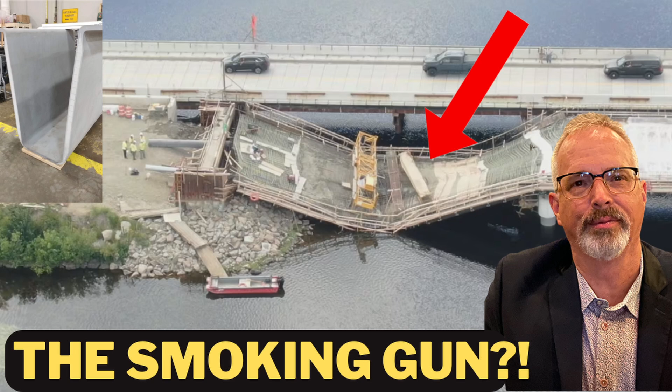Hi, everyone. I've got an interesting update for you today on that situation of the partial bridge collapse in Old Town, Maine that occurred on August 13th, 2025. I'm recording this video on August 18th.

Many of you have reached out with some great insights as well as source information. One of you was obviously a structural engineer and pointed out that they believe there was a construction sequencing issue. I'm going to go over this in more detail, but this source pointed out to me that there could be a serious issue with construction sequencing if, in fact, they placed concrete inside these composite tub girders at the ends prior to placing the concrete for the bridge deck. That looks like that could very well have been the case here.

Now, one concern I have already is that there's a lot of interconnectivity among all the principal players on this project. You have the Transportation Infrastructure Durability Center that gets tens of millions of dollars of federal funding to conduct research that leads to things like these composite tub girders, and they've apparently started pulling videos, or at least in one instance pulled a key video from public viewing from their YouTube channel. It's either been deleted or privated. This was reported on by Maine Public, and I've confirmed there are bits of the meta tags of this video out there on the internet. So this video did exist up until recently, and the title is FRP Composite Tub Girder Installation for the Stillwater Bridge Replacement, March 2025. So I don't think that's a good look.

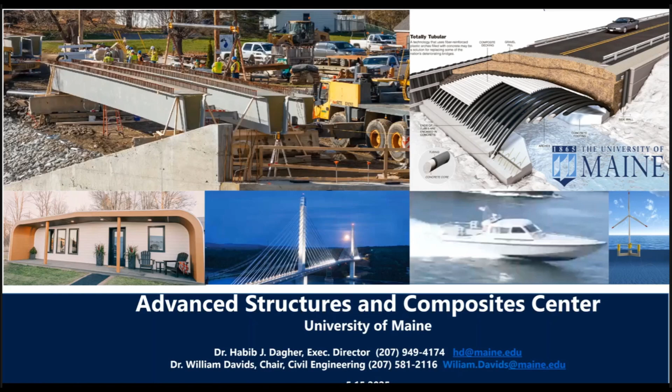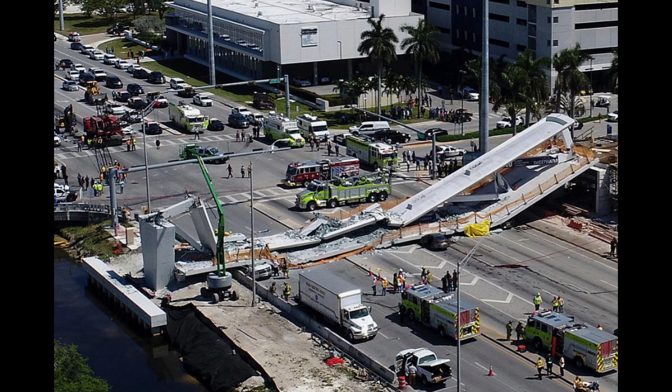Now, fortunately, there are some videos related to this technology and specifically to this bridge that have not been deleted. I'm going to cite heavily from these two presentations. If you're wanting to check out the entire videos, there's links in the description. A more technical presentation was presented by people with the university as well as the manufacturer of these composite tub girders. This webinar was hosted by Florida International University. That sounds familiar - they had the tragic pedestrian bridge collapse that occurred in 2018 that killed 6 people.

Now, the university developed this composite tub technology and licensed it to a Maine company, Basalt International. Technically, the girders are manufactured by AIT Bridges, but they went bankrupt and were acquired by Basalt International in January of 2025. See this tout sheet I covered in my previous video.

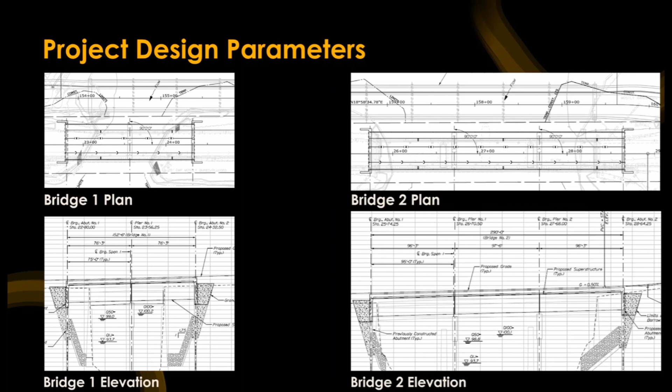Now, again, from this technical presentation, there were a lot of details associated with this Stillwater Bridge that suffered the span collapse. There are really two segments of the bridge, what they're calling Bridge 1 and Bridge 2. Bridge 1 has a total length of 152.5 feet, comprised of two 75-foot long spans. Bridge 2, where the failure occurred, is a total length of 290 feet, comprised of three 95-foot long spans.

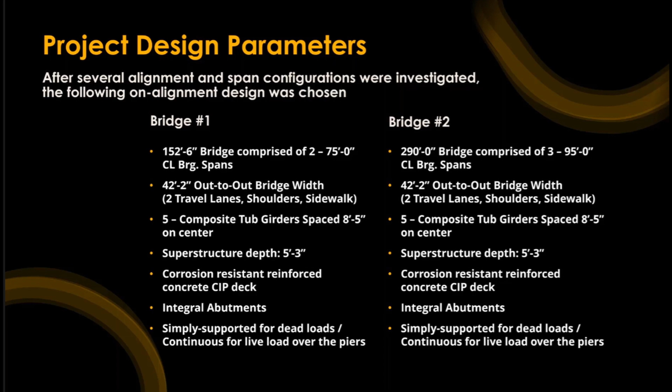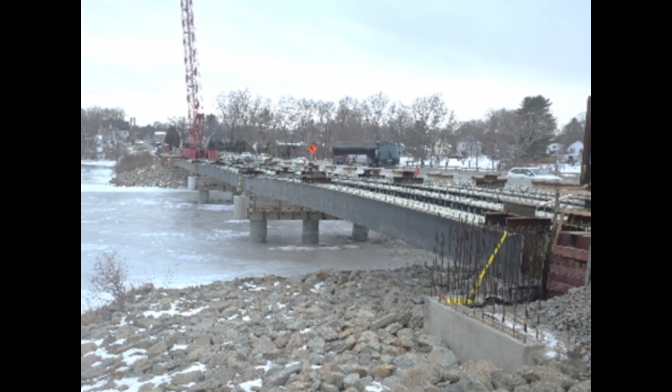Each span has 5 composite tub girders spaced a little over 8 feet center to center. The depth of the girders is a little over 5 feet. See a photo here from the Maine DOT website for this project. This is a close-up view of a composite tub girder.

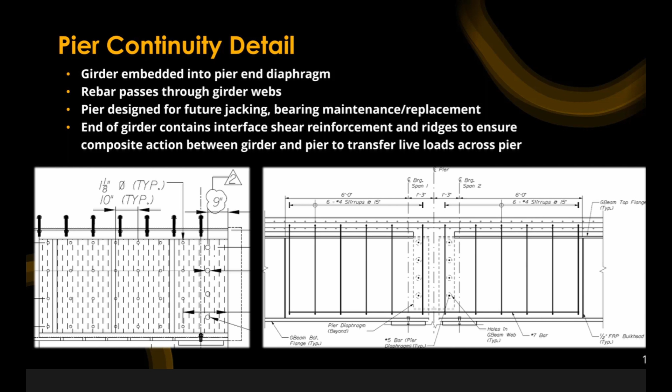Now, going back to what the structural engineer shared with me, these composite tub girders are empty inside, but they get concrete infill on the ends and at the center where they go over a pier at a given location. This is showing the cross section with infill at the ends. And when you have this concrete infill, they've got shear connections to hold it all in place inside the composite tub girder.

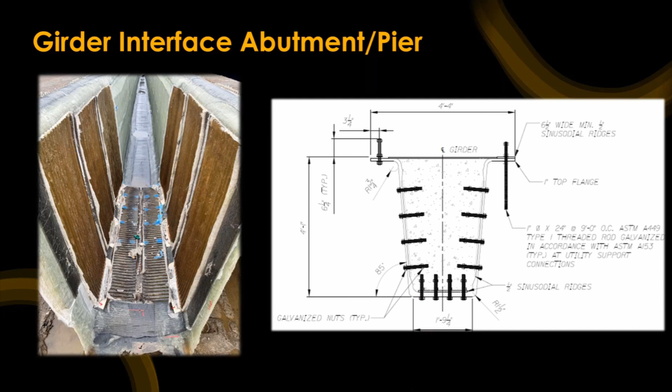What this structural engineer was explaining to me: you have a camber or a bow in these girders, and the high point is on the top surface. When you set these girders on the abutment or a pier, you're anticipating the loading from the subsequently placed bridge deck to flatten out or push down that camber to straighten it out. And when that happens, the girder elongates on its connections.

And if you have the ends fixed or rigid so they can't move outwards because you've already got your concrete infill there, you're going to have stress concentrations that could be problematic and could perhaps have contributed to this failure here. Now, I'm just going by the drone photos. It looks like the infill may have occurred there already.

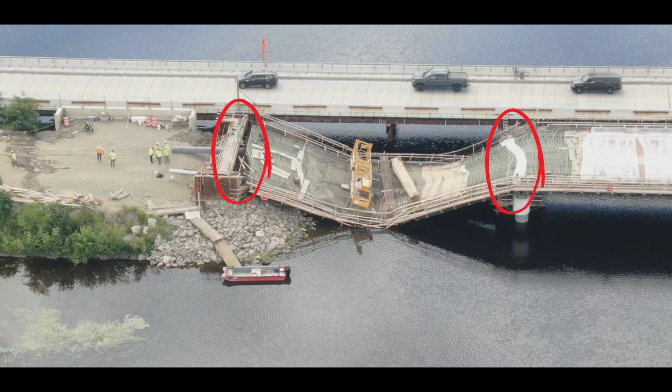As part of the development and implementation of a technology like this, you would need the designer to specify in very great detail what the installation sequence needs to be, and of course the contractor would need to follow such an installation sequence. So I'm sure that's going to be part of any forensic investigation as to what happened here. But it sure looks to me like there may be concrete infill already on these end pieces.

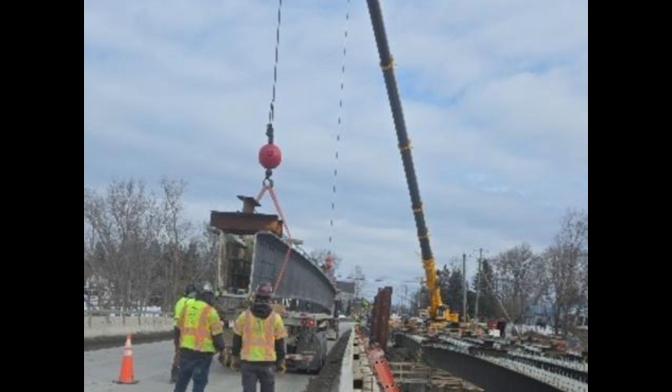And of course, you have the concrete paving machine sitting at the center of this span in preparation of placing the concrete over the bridge deck. Here's a photo showing one of these composite tub girders being offloaded from a truck. You can see the camber there at the top of the girder.

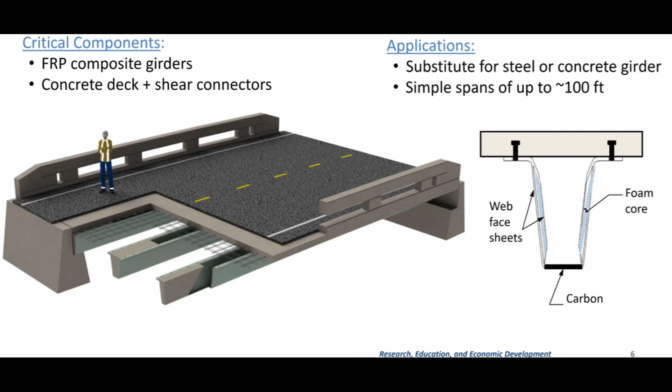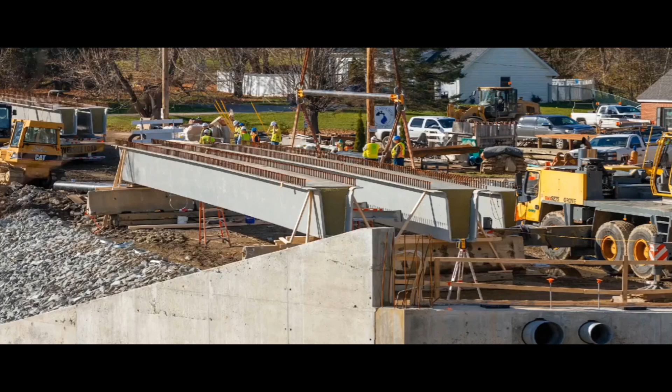As you might expect, a lot of the rigidity of the overall superstructure comes from having the bridge deck in place over the girders. So during construction, before that's happened, the overall structure could be more vulnerable to mishap. You see a picture of these shear studs where the bridge deck connects to. In the future, if you need to replace the bridge deck, you can remove the bottom of those connectors below the girder and then just peel the bridge deck off and replace it.

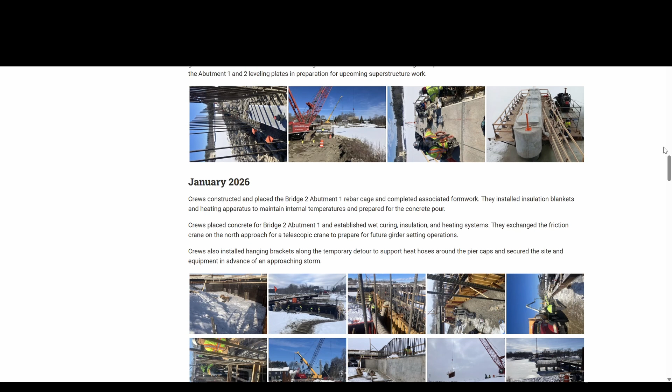So construction sequencing is one suspected issue associated with this bridge collapse. Another, as I alluded to in the previous video, is there are numerous mentions of damage and repairs to these composite girders on the Maine DOT website for this project. And again, I have to wonder to what extent well established procedures to identify damage and to repair it and inspect it were defined for a project like this.

And if there were damaged girders, what caused the damage? How extensive was the damage? Should the girders have in fact been replaced? Those are questions that I asked Maine DOT, and they're not providing any answers at this point.

Now, I want to tie in what the overall funding mechanism is for technology like this. The Department of Transportation has a program called ARPA-I, and it's a program to develop advanced technologies for improving the overall transportation system in the United States. And a subset of this ARPA-I program is called XBridge.

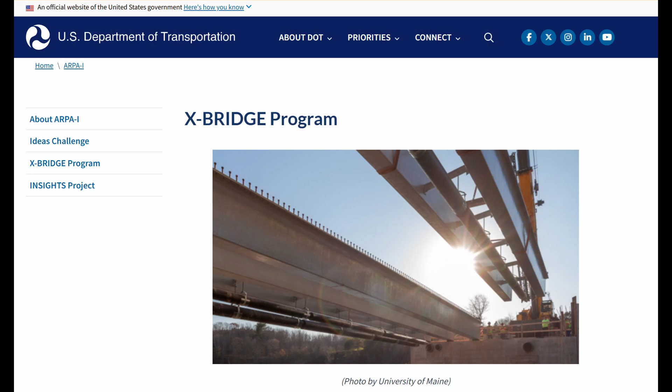And it looks like XBridge has provided $23 million to the University of Maine's Advanced Structures and Composite Center, where this composite tub girder technology was developed and then later licensed to Basalt International. The program is pioneering a bridge design approach that utilizes high performance corrosion free materials to replace traditional corrosion prone construction. Well, that's a good goal to have.

Corrosion is a multi-billion dollar problem in the United States for bridge infrastructure. Now, this caught my attention. The program is rapidly transitioning from theoretical design to real world validation through full scale prototypes and milestone demonstration projects. Rigorous durability evaluations, including accelerated aging and full scale fatigue testing, are underway to validate a 150-year service life. Demonstration projects are planned to be built over the next 5 years. XBridge is collaborating with state DOTs and the composite industry to explore and overcome barriers to implementation.

Well, of course, a potential big barrier to implementation is when you have a catastrophic failure that occurs during construction. Again, we don't know the details. The investigation's ongoing, but I emailed this XBridge director, Miss Severance, and she told me just to reach out to the DOT, and I told her I already had, and I thought as director of XBridge, she might have something to say about the program's future, any thoughts about what happened with the Stillwater Bridge, and I got no response.

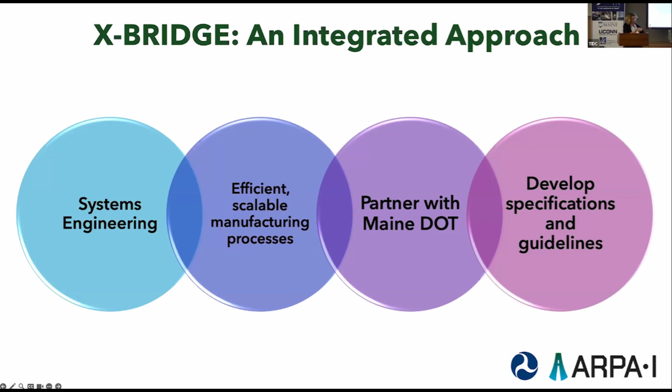Now, as part of her presentation, again, linked in the description, the overall process here is to utilize systems engineering to transition into manufacturing, partner with, in this case, Maine DOT, and develop specifications and guidelines. And what a systems engineer's key responsibilities are is they write and translate the client's needs into clear technical specifications. They figure out what needs to be done.

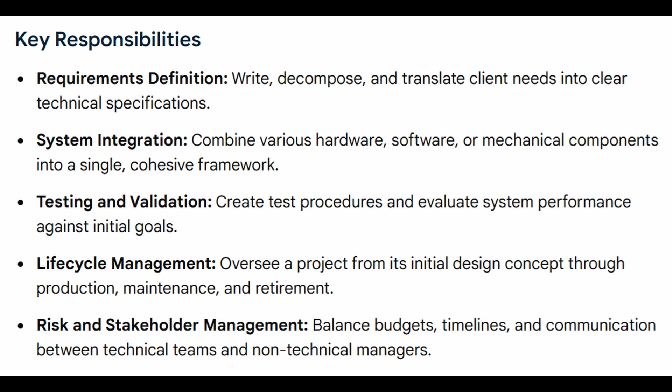They provide systems integration, combining hardware, software, mechanical components into a single cohesive framework. They define the requirements and verification for testing and validation. They define all the aspects of the life cycle management from design concept through production, maintenance, and retirement, and they look at risk and stakeholder management in terms of budgets, timelines, communication between technical and non-technical team members. So they're involved in the process from soup to nuts, as they say.

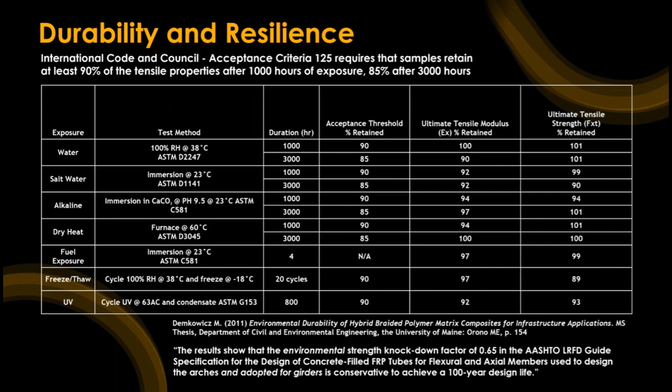Now, many of you asked in the previous video, how could anyone expect a composite bridge to last 100 years or 150 years? And I still think it's an open question. The short answer is they did modeling. So they subjected these composite tub elements to various environmental and loading cycles. But it looks like the loading cycles were anywhere from 800 hours to 3,000 hours in duration. So that's basically anywhere from 1 to 4 months. And then they extrapolate those results to a 150 or 100-year period.

Apparently, the design for these composite tub girders were also done using draft AASHTO guide specifications. AASHTO is an organization of state bridge entities that define design guidance and various aspects of how you design and construct bridge projects. And some of this gets super theoretical, I think unduly so.

I've done previous videos about the Francis Scott Key Bridge and how anybody with a lick of common sense would have realized how vulnerable that bridge was to ship impacts. And AASHTO's response, even though they knew of these vulnerabilities for existing bridges, came up with design guides back in the 90s that were heavily probabilistic, and they decided to apply it to new bridge construction. And in the aftermath of the Francis Scott Key Bridge, now people are looking at applying it to existing bridges, which should have been done all along, but it's kind of a silly, in my view, probabilistic approach. It could have some value in overall risk assessment, but it shouldn't be the final word in determining what you need to do to protect your bridge, because it has things like estimating the size of a ship 20 years from now. I mean, that could be a problem.

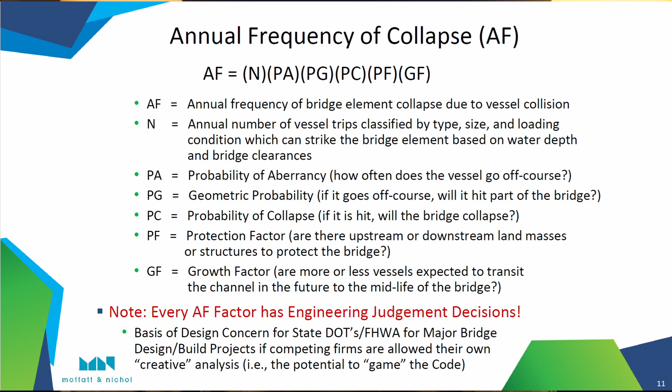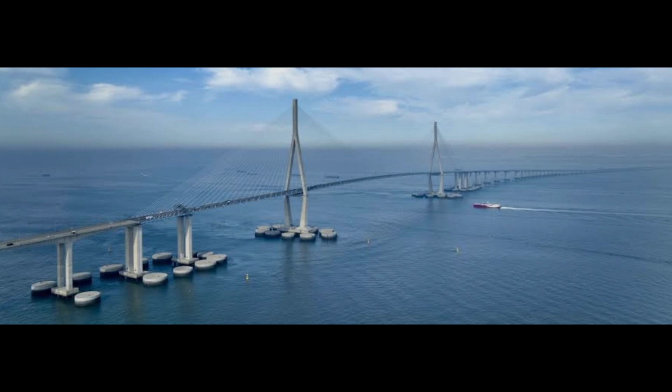How much ship traffic you're going to have, the odds that a ship could go off course. And you go through this whole statistical process to determine the risk assessment for a given bridge. And I prefer or would recommend a more resilient approach, and basically design a bridge. If you think it could get hit by a ship, an errant ship, for whatever reason, design the bridge such that that can't physically happen. In this situation, you've got a heavily probabilistic approach.

They apparently took experience with fiber reinforced polymer wrapped bridge columns for seismic retrofit and applied it to this composite tub technology.

I don't know how well you could model the effects of transportation and construction. These are new technologies. I'm all for new technology. I think the U.S. needs to be more innovative, particularly for infrastructure projects where I make a living. But also, there has to be an appropriate level of risk that's assigned to it.

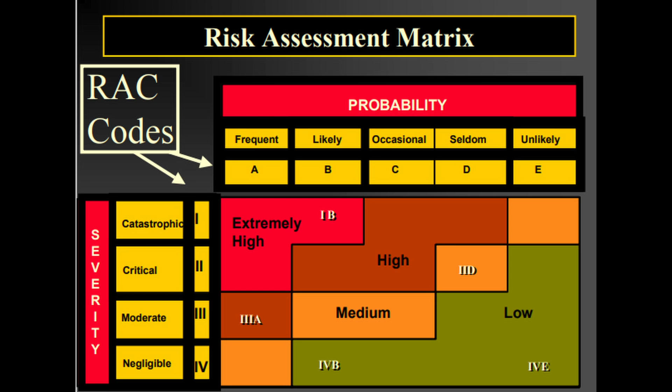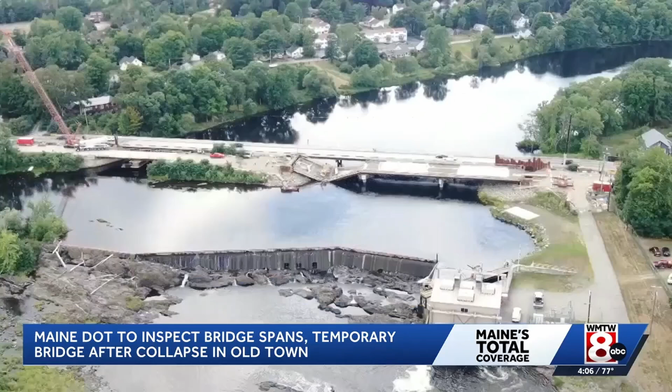If you look at a risk matrix, you shouldn't be using a new technology that has a potential for catastrophic failure. You would expect maybe a nuisance level, or a lower level of risk that produces a nuisance and maybe has to be repaired or replaced in a period shorter than you had planned for. But having the possibility of a catastrophic failure shouldn't be one of the options, in my view.

If you read the background of the patent, the rationale is to have lighter weight compared to steel or reinforced concrete girders, to make them easier and more efficient to transport and install using smaller cranes at a construction site. There is zero mention of improved corrosion resistance or longer lifespans anywhere in this patent application. Just thought that was interesting. Generally, I thought you tried to make patent applications as broad as possible to cover as many use cases for your claim. As part of this presentation that I've referenced, there's a link in the description.

There are existing bridges that were constructed using this composite tub technology, including in Rhode Island in 2022. And I think potentially that's the other shoe to drop. Most likely, the problem that led to the collapse of this span at the Stillwater Bridge is a construction phase issue, which hopefully won't create a question about the safety and reliability of these existing bridges that are already in place. But I've got a large audience in Rhode Island, so we'll see how it happens here, because there's potential implications for you all here.

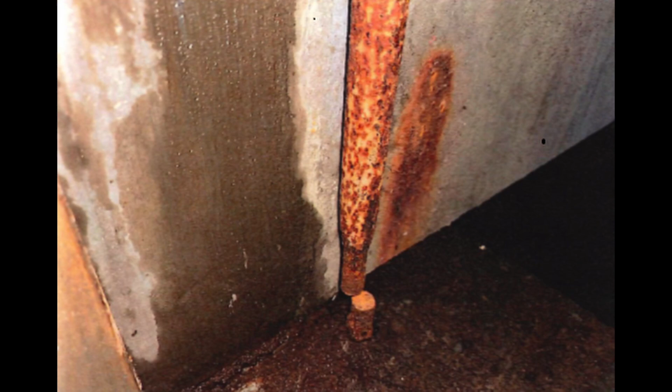But this technology could really benefit a state like Rhode Island, where they tend to let their bridges corrode into oblivion. You have to look no further than the Washington Bridge in Providence. But I'll continue to follow this story.

With that, I'm going to do a quick book mention: Lolly Willowes by Sylvia Townsend Warner. I really like this book. It was published in 1926. In essence, to me, it's about a person who doesn't follow the conventional path, and doesn't follow the path based on expectations of others, particularly other family members in her life. It has some interesting elements, some pretty funny moments in the book too. It's set in the interwar years between World War I and World War II, a setting I typically don't engage with in a book. So I really liked it. If you're so inclined, I've got a link in the description.